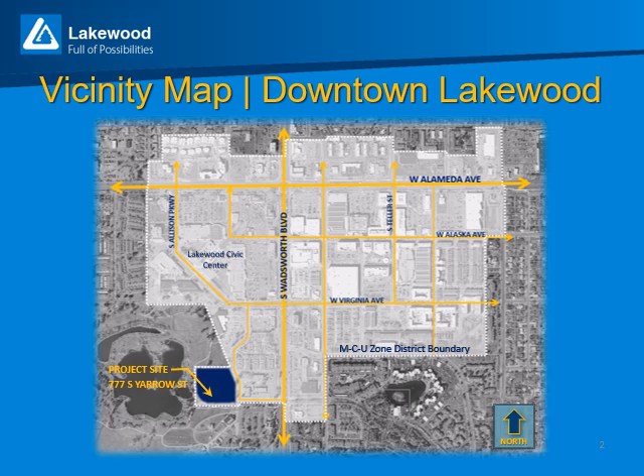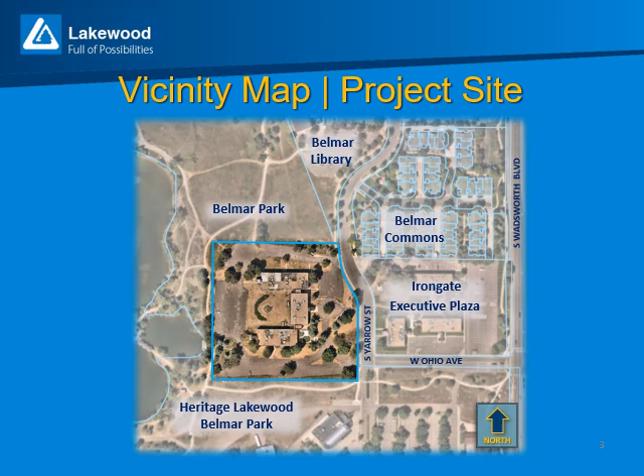Zooming in closer to the site, as depicted on this slide, we see that the site fronts onto South Yarrow Street and is surrounded on three sides by Belmar Park. The site was initially developed in the 1970s and early 80s as part of the phased Irongate Executive Plaza office complex, which included 777 South Yarrow Street and the property directly east of it.

The applicant is proposing to redevelop the 5-acre site with a 6-story, 411-unit multifamily building. The new development will include 561 parking spaces located in a parking structure internal to the building. As part of this redevelopment, the property owner has agreed to dedicate approximately 8,600 square feet of land that surrounds the historic pump house to the City of Lakewood.

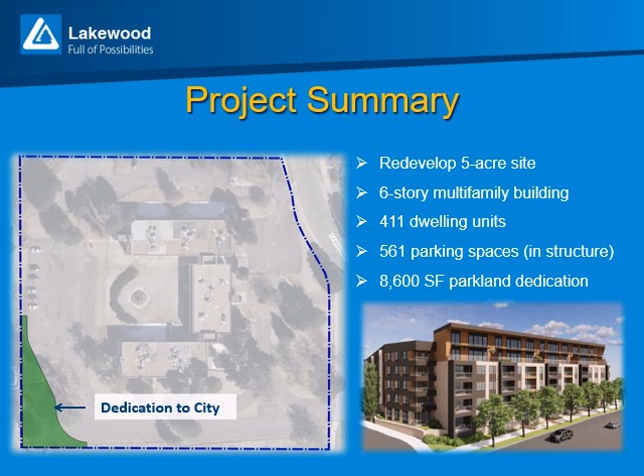The existing pump house, currently located on private property, is covered by a municipal purposes easement, which will be vacated after the deed conveying this land to the city has been recorded. The warranty deed for the parkland dedication has been fully executed, and the document will be recorded by city staff following the public hearing if Planning Commission determines that the major site plan satisfies the applicable zoning regulations.

In its current configuration, the gross site area is 5.25 acres in size. The proposed land dedication to the city will result in a net site area, or developable area, that is 5.05 acres, which is reflected as the site area and new boundary configuration depicted on the site plan and on this slide.

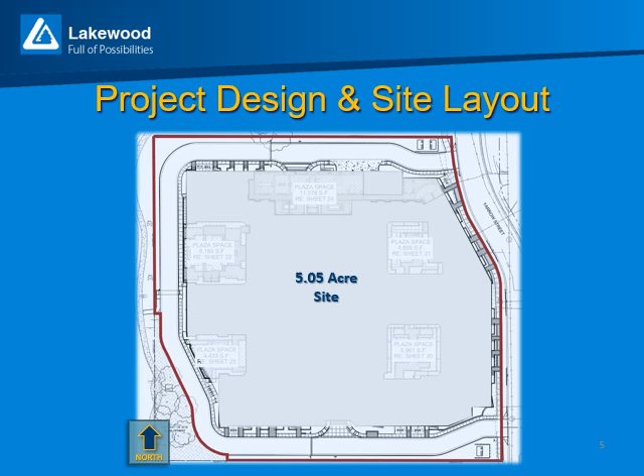Vehicle circulation and emergency vehicle access is accommodated via a private driveway that will take access from South Yarrow Street in 2 locations. Access to the parking garage is internal to the site at the north and south sides of the building. The project will include signage restricting access for non-emergency and non-service vehicles west of the garage access points.

A change in surface material is proposed for the portion of the driveway where access will be restricted to any vehicle that is not on site for emergency or utility service purposes.

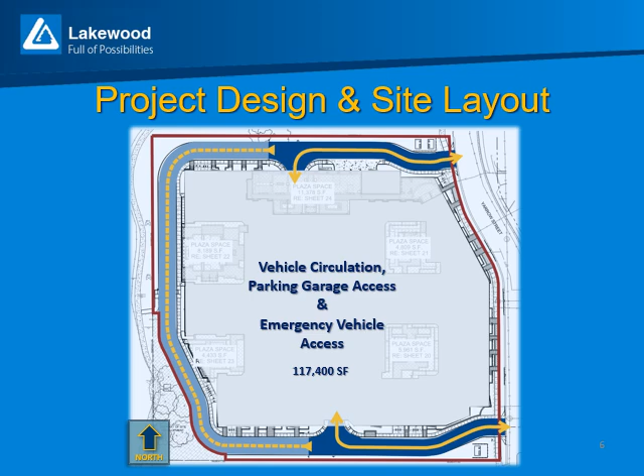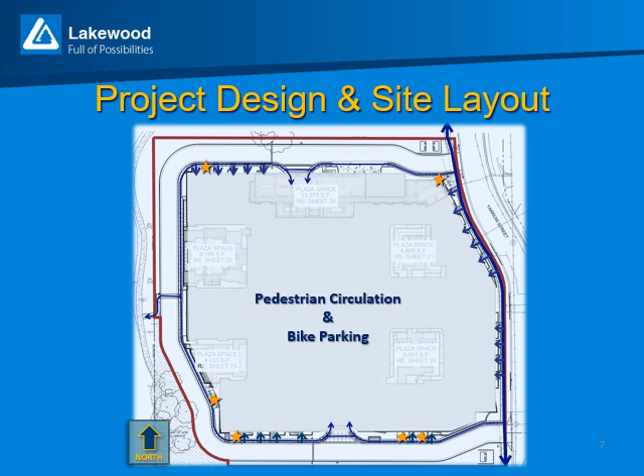Grade separated sidewalks are proposed from the public sidewalk on Yarrow Street to the ground floor entry stoops, the project plazas, and bicycle parking facilities, as well as the primary building entrance. Bicycle parking facilities are identified with a star symbol on this slide. Private internal sidewalks also connect to the public trail located west of the project site in Belmar Park.

The proposed building footprint is 128,778 square feet in area, which includes approximately 35,000 square feet of parking structure that is wrapped on all sides by residential dwelling units.

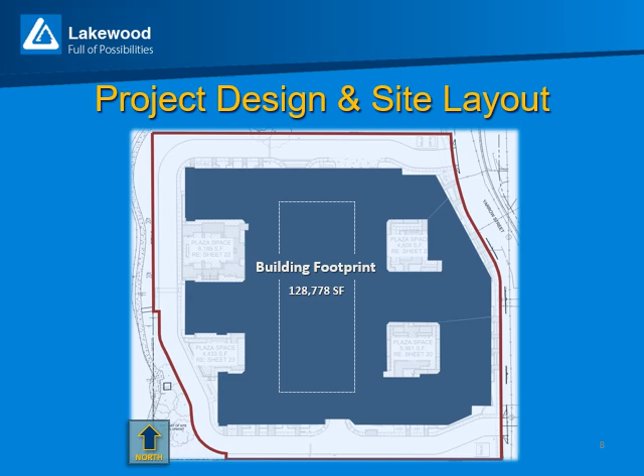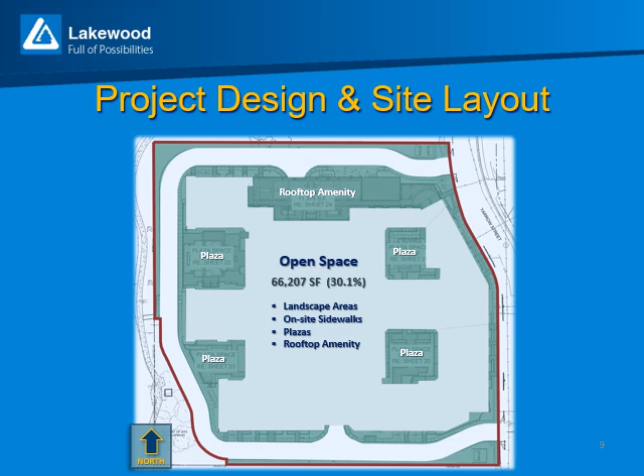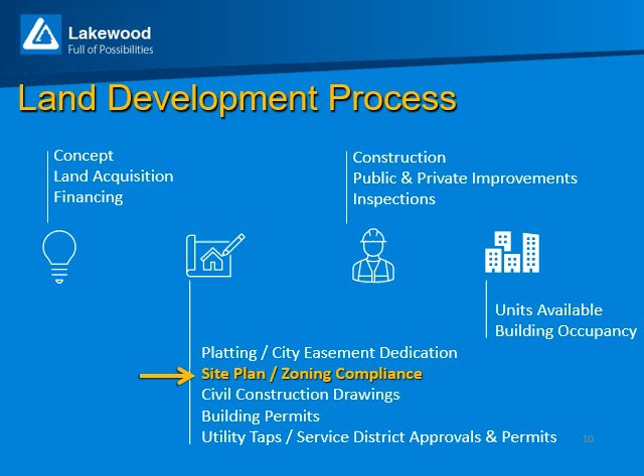Compliance with adopted zoning regulations is only part of the overall land development process required to secure building permits. In addition to the major site plan, there are other design plans, reports, and construction documents that do not fall under the planning director's authority to review or approve. For example, civil engineering construction documents and reports are required with the formal site plan application, but they are reviewed and approved concurrently by the city engineer.

The zoning ordinance designates the planning director as the authority responsible for reviewing and rendering a decision on the major site plan document. Separate from the city's review and permitting process, a developer must also navigate the plan review and approval process required by the sewer and water district, fire district, and dry utility agencies that provide gas, electricity, and communication to the project.

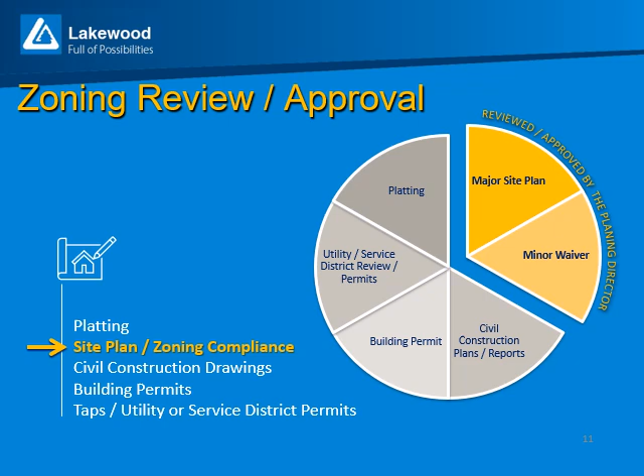The city issues a courtesy referral of the site plan application to applicable utility districts and service providers to inform them of the development proposal. This allows the utility districts and service providers to review the project and communicate specific agency regulations, permit requirements, and review processes back to the applicant.

Following the initial project referral, it is the applicant's responsibility to submit required detailed design plans directly to the district or agency to secure plan approvals and/or acquire any non-city permits. Each district and agency have their own application and permit process. Separate agency reviews and permits are not required prior to the major site plan approval.

Article 2 of the Lakewood Zoning Ordinance establishes the processes and procedures for planning review within the city of Lakewood. A major site plan is required for redevelopment that includes a new building or when a change is proposed to the site that affects 20% or more of the site area. The site plan is intended to demonstrate compliance with zoning regulations pursuant to the process outlined in the zoning ordinance.

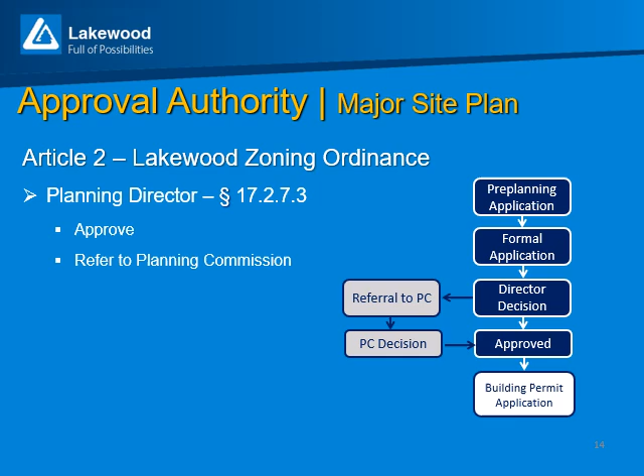The planning director has authority to review and render a decision on a major site plan application, or the planning director can refer the application to the planning commission to hear and render a decision.

A minor waiver is required whenever an applicant has proposed a superior design modification to a design standard within the Lakewood zoning ordinance. Recommendations and decisions regarding waiver applications shall be based on the review criteria in the zoning ordinance.

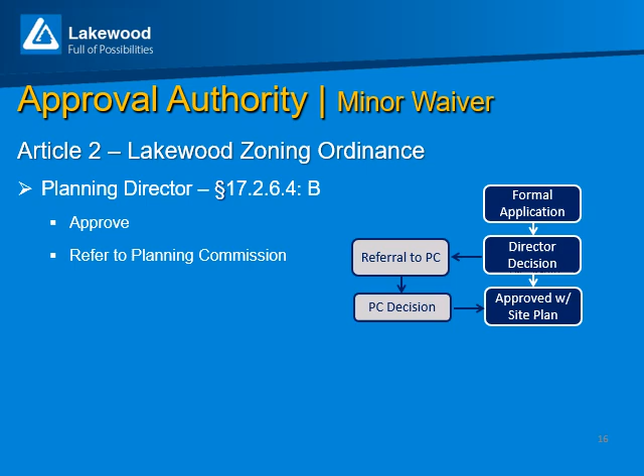Similar to the site plan process, the zoning ordinance gives the planning director authority to review and render a decision on minor waiver applications or refer the application to the planning commission to hear and render a decision.

Notice of the public hearing was posted on the subject site, posted at City Hall, and published in the newspaper of record, as well as on the city's website. The zoning ordinance does not include a mailed notification requirement for major site plans or minor waiver applications, including those that are referred to the Planning Commission by the planning director.

Recommendations and decisions regarding the major site plan shall be based on the following criteria. First, the major site plan shall comply with the standards outlined in Articles 3, 4, 5, 6, 7, 8, 10, and 13 of the zoning ordinance.

Second, the director shall evaluate how well the proposed modifications contribute to the overall performance of the site and how well the proposed changes meet the standards in those same articles of the zoning ordinance.

Articles 3 and 10 do not have standards applicable to this land development proposal. Article 3 is applicable to development applications that are seeking to be initially zoned or rezoned into a new zone district and does not have any specific designs or development standards that are applicable to site redevelopment.

Article 10 outlines standards and review processes applicable to wireless communication facilities. The proposed multifamily development does not include any existing-to-remain or new wireless communication facilities as part of the project.

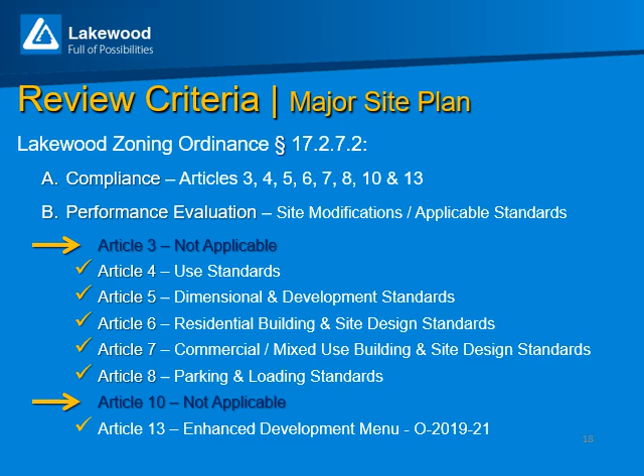Zoning standards for projects in mixed-use districts with an urban context are intended to achieve a pedestrian-friendly environment with a street network that is conducive to pedestrian and bicycle access.

The context requires buildings to be located within a short distance of the adjacent public street, with parking located within a structure and/or to the side of the building.

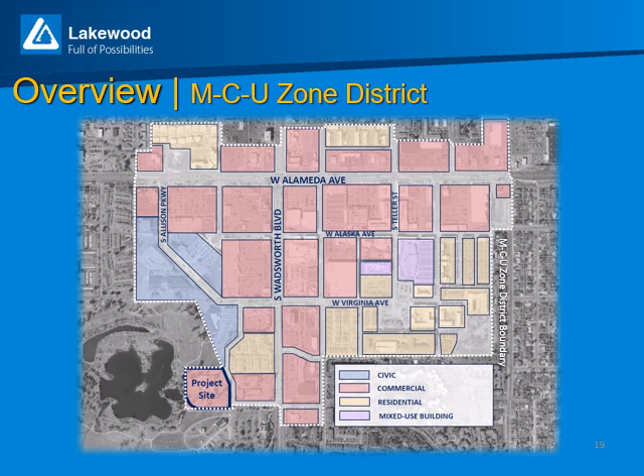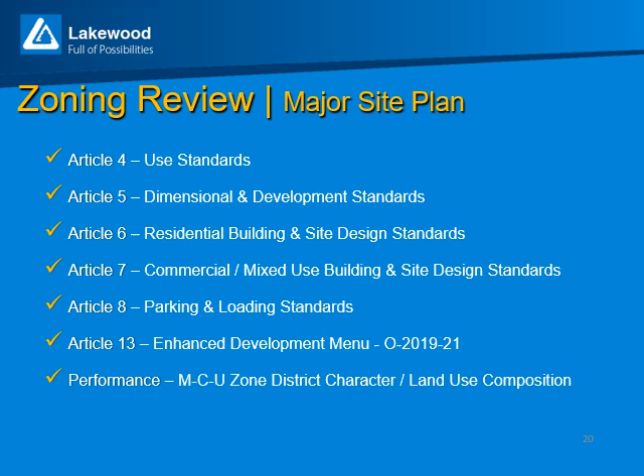This major site plan was reviewed to ensure compliance with the applicable zoning standards, and it was evaluated for the project's performance and overall contribution towards achieving the intended character and land use composition within the mixed-use core urban zone district.

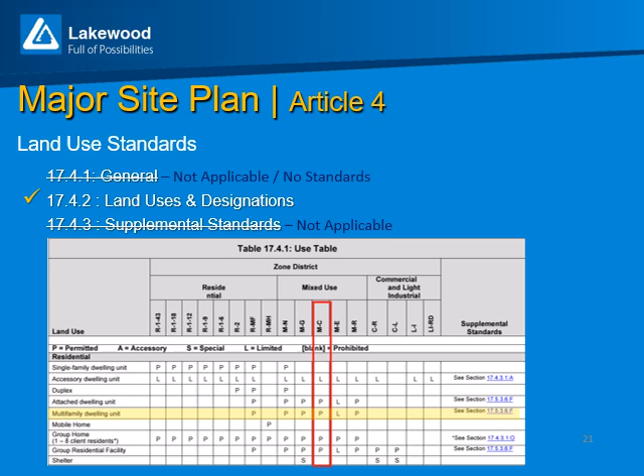Pursuant to the use table depicted on this slide, the proposed multifamily dwelling unit land use is a permitted use in the mixed-use core zone district. The section reference 17536F in the supplemental standards column of the table is only applicable to residential projects in the mixed-use employment districts and does not apply to this project. Article 5 standards regulate the placement and height of buildings, which apply to all new development and redevelopment.

Under the general standards, the project complies with the setback and height applicability, exception, and measurement standards. The development proposal includes a minor waiver request to the facade setback requirement, which will be addressed later in this presentation. Standards located within Section 1752, 1754, and 1755 are not applicable to the proposed project. The project does comply with the applicable dimensional and minimum story requirements, which I will detail on the next slide.

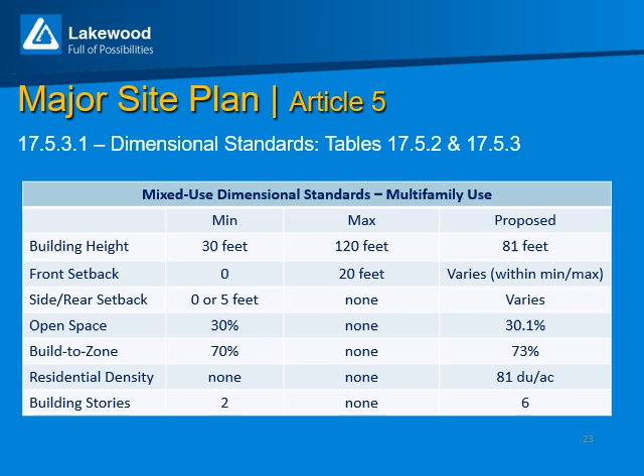This chart shows the dimensional standards that are applicable to new projects within the M-C zone district. The site plan was reviewed to verify that the project satisfies the building height, setback, minimum open space, minimum build-to zone, and minimum building story requirements.

Article 6 establishes site and building design standards for new residential development in Lakewood. The project is satisfying the building design, screening, pedestrian circulation, landscape design, fence, and lighting standards, as I will detail over the next 8 slides.

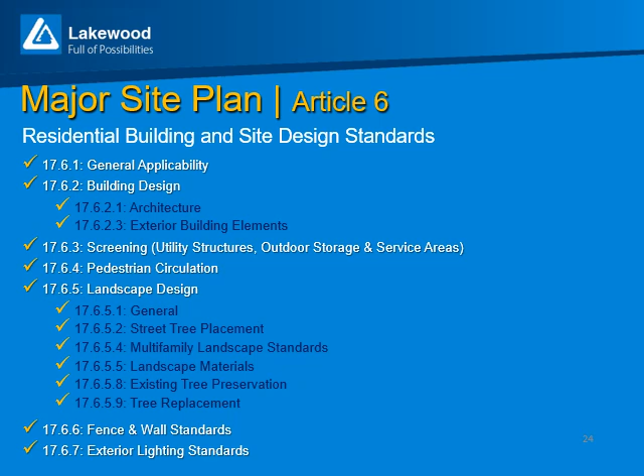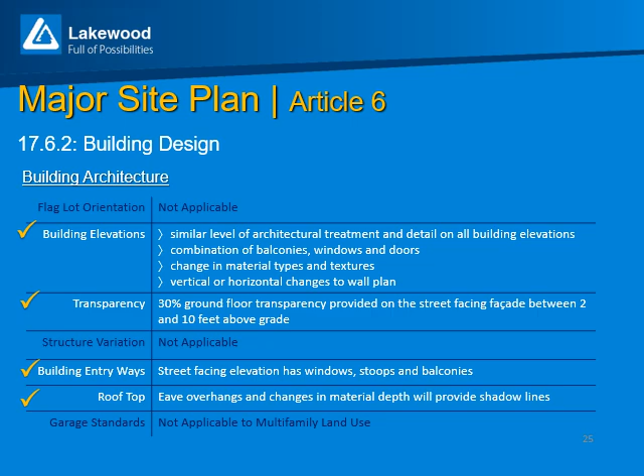Section 1762 includes standards that inform specific aspects of the building design and building architecture. The site plan was reviewed to verify that the project satisfies building elevations, transparency, building entry, and roofline contrast for the portion of the building that includes the slope roof.

To minimize the impact of mechanical and service elements associated with the building, the proposed utility meters will be screened from view of the public street. Rooftop equipment will be screened by parapet walls, and roof drains will be architecturally integrated into the building structure. The project does not propose any stairwells that are exterior or external to the building.

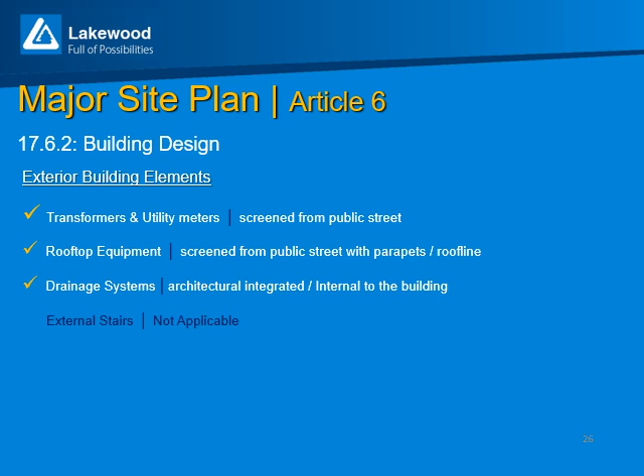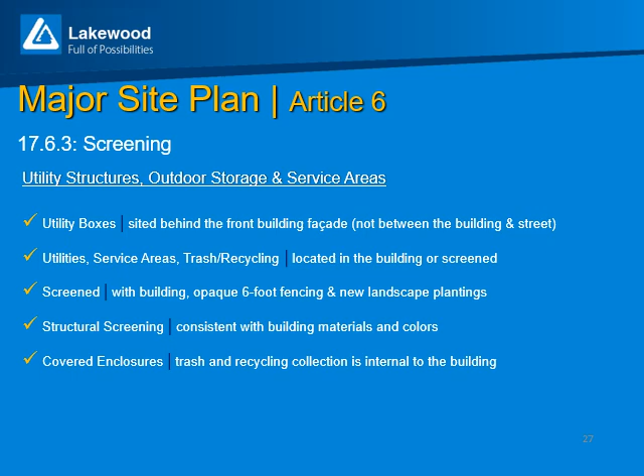Moving on to standards associated with utility structures and building service areas, the 2 transformers required for the project are located behind the front building facade and will be screened with structural and landscape elements on all sides except for where an opening is required for access. Trash and recycling collection bins will be located within the building and will be covered by a roof.

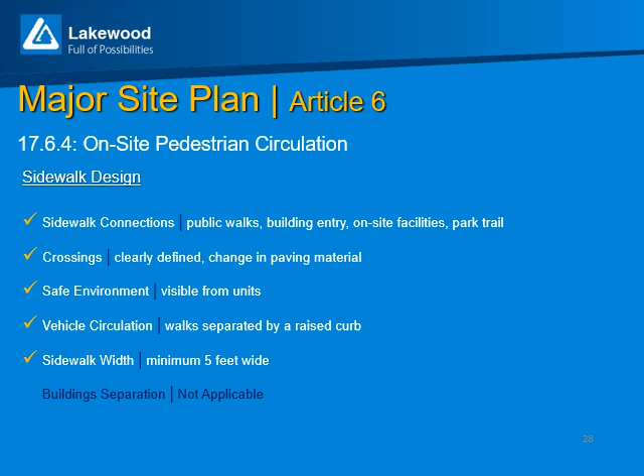Internal sidewalks will provide pedestrian access to primary building entrances, all on-site facilities, the adjacent public sidewalks, and the multi-use trail in the adjacent park. All sidewalks will be at least 5 feet in width, and they will be separated from vehicle driveways by a raised 6-inch curb.

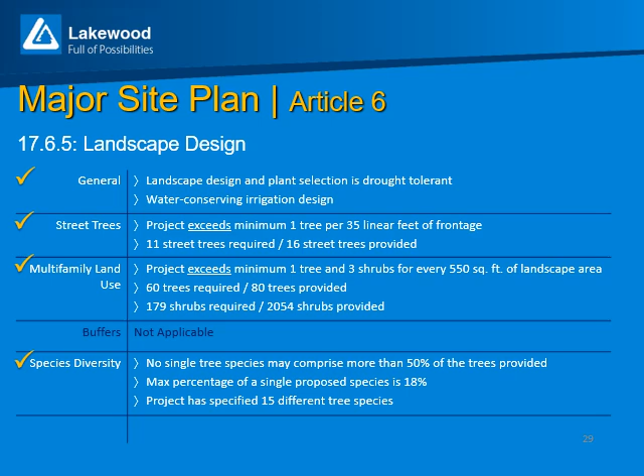The project landscape design includes a diverse plant selection that is appropriate for our arid climate. The proposed landscaping will exceed the minimum street tree and on-site tree and shrub quantity requirements as outlined in section 17.6.5. The trees and shrubs that are specified in the plant schedule are consistent with the minimum size requirements for new plant material, and the project will satisfy the tree replacement requirements through a combination of new trees being planted as well as a fee in lieu.

The project will be preserving and protecting 7 existing trees, removing 66 trees, planting 174 new trees, and will pay a $415,200 mitigation fee pursuant to section 17.659 of the zoning ordinance.

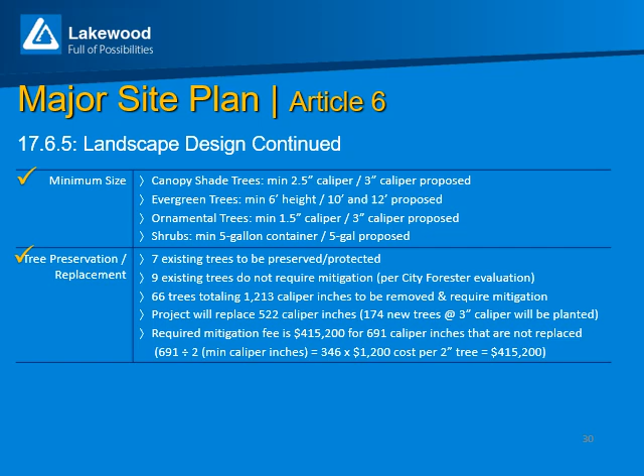The project will have open ornamental iron fencing for ground floor residential stoops and to enclose the proposed courtyards. Site fencing will range in height from 3.5 to 5 feet tall, which is well within the 6-foot height fence limit for multifamily uses. A 6-foot privacy fence/utility equipment screen is proposed to screen the new transformers, which will be located at the northeast and southeast corner of the site.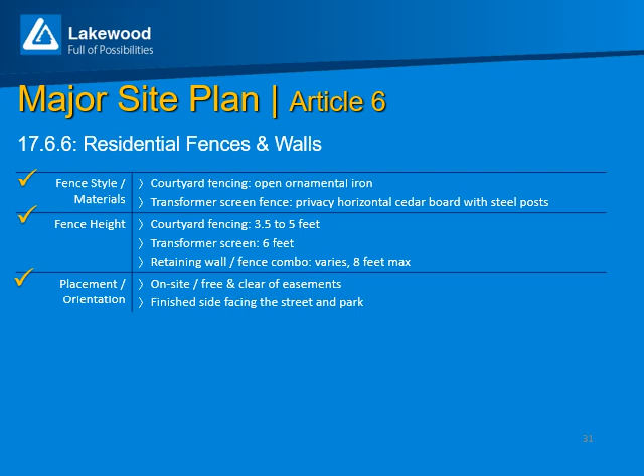The project is designed to achieve a 0-foot candle reading at all property lines. Light fixtures are full cutoff and directed down towards the ground. Energy efficient outdoor lighting is specified for the project.

Article 7 establishes building and site design standards for all buildings and sites with uses other than residential development in the city. In general, the building and site design standards in Article 7 do not apply to this project because it is a residential land use.

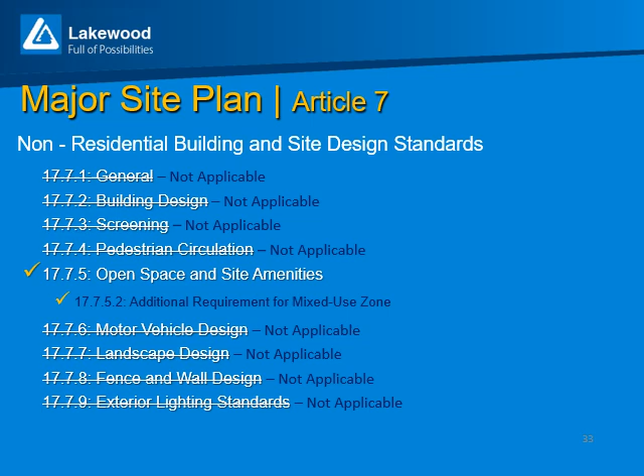However, a more restrictive applicability statement located in section 17.7.5 states that the open space and on-site amenities requirement is applicable to residential developments when the site is greater than 2 acres in size.

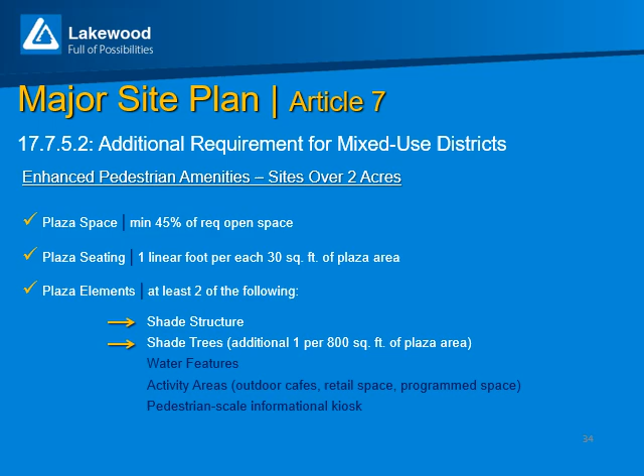The site has been designed to incorporate 5 separate and unique plaza areas that exceed the minimum area required in the mixed-use core urban zone district. In addition to seating, each plaza incorporates 2 additional pedestrian elements to satisfy the enhanced pedestrian amenity requirement pursuant to this section.

Article 8 establishes parking standards for each land use within the zoning ordinance. The project is satisfying the general, visitor, bicycle, electric vehicle charging, and loading standards as detailed over the next 4 slides.

The proposed parking garage will accommodate more than 1.25 residential parking spaces per unit, plus an additional visitor parking space at a rate of 1 space per 15 units, for a total of 561 spaces.

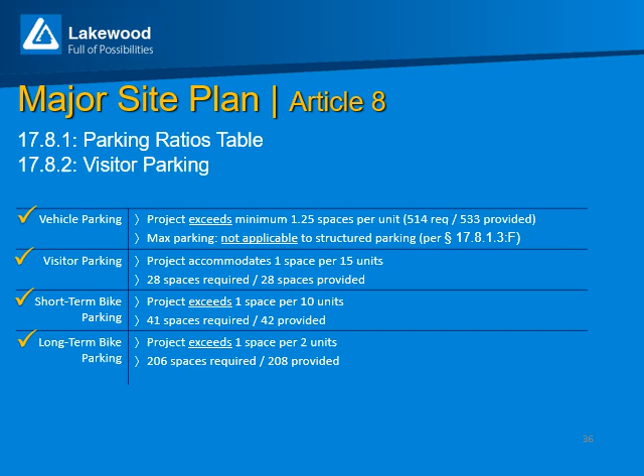Bicycle parking is accommodated via 42 short-term parking racks and 208 long-term bike parking spaces. Bike racks providing short-term bike parking facilities are located in proximity to the building entries and are accessible from the internal sidewalks that connect to the public walk and park trail.

Long-term parking and bike storage is accommodated in a dedicated locked bike storage room located within the building.

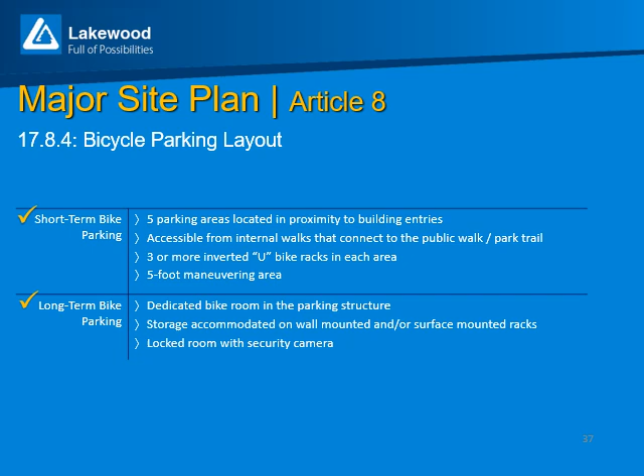New multifamily developments are required to provide electric vehicle charging stations along with electric vehicle charging station capable parking spaces. The project will include 12 parking spaces that will have EV chargers installed when the CO for the building is issued. An additional 109 spaces will be constructed as EV capable spaces, so additional charging stations can be accommodated as warranted by future demand.

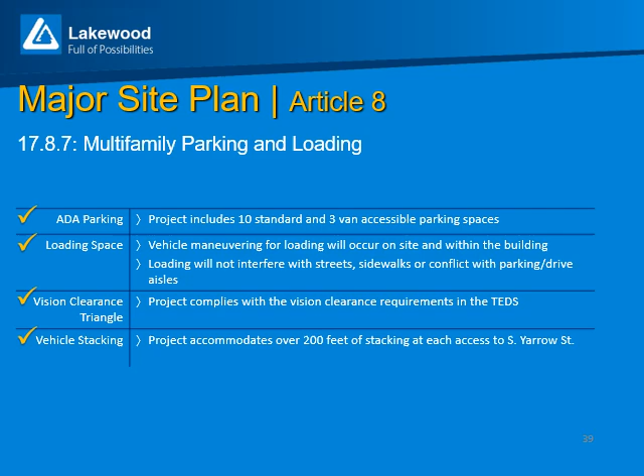Building services and project loading is located on site and internal to the building with access through overhead doors on the north side of the structure. The site will accommodate over 200 feet of stacking at each driveway access point onto South Yarrow Street, which is well over the minimum 60-foot stacking required based on the number of parking spaces.

The major site plan was reviewed for compliance with Article 13 Enhanced Development Menu Standards that were in place at the time of the formal site plan application. Based on the proposed building gross floor area, the project is achieving the required 50 points through the 9 menu items that are listed on this slide.

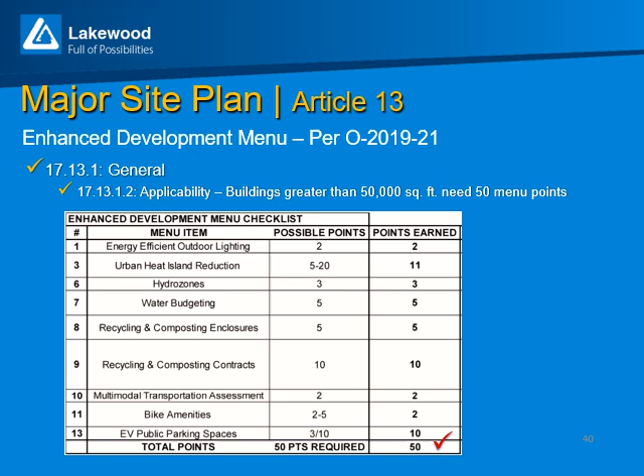To recap, the purpose of the major site plan review is to ensure the development proposal complies with the applicable zoning standards in Articles 3 through 8, 10, and 13, and to evaluate a project's performance and overall contribution towards the character and land use composition within the mixed-use urban core district.

It is now time to take a look at the design waiver request to address minor encroachments associated with the facade step-back standard per section 17.515C, located in Article 5.

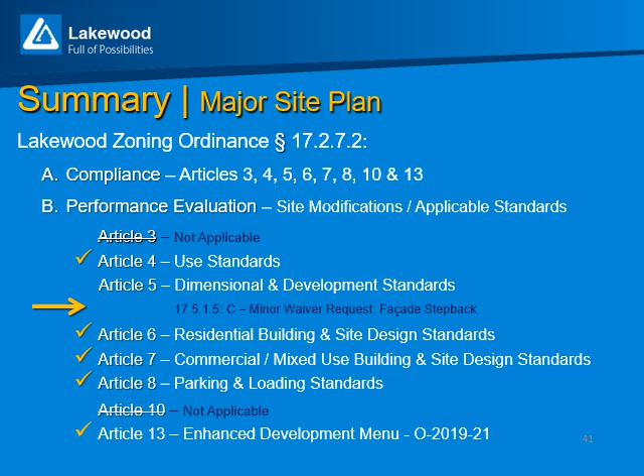The facade step back requires buildings that are taller than 45 feet in height to provide a 10-foot facade step back at that 45-foot building height, along with another 10-foot step back for every additional 30 feet in building height.

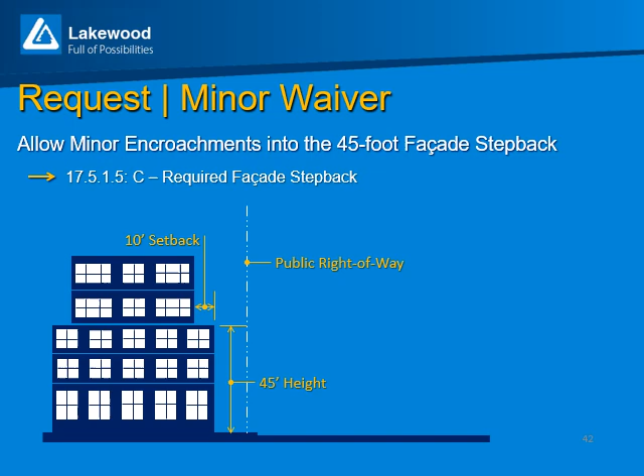The applicant is requesting relief from the facade step back to allow minor building encroachments above the 45-foot building height and within the 10-foot facade step back area.

If the request is approved, it would allow architectural elements including the roof overhang, cantilevered rooftop open space, balcony canopies, and unit privacy partitions, all depicted in green, to extend into the 10-foot facade step back. The waiver will also allow minor encroachment associated with several of the 4-story units, which is occurring due to the 6-foot elevation grade change along the public right-of-way adjacent to the front building facade.

When measured from the high point right-of-way elevation, located near the midpoint of the Yarrow Street building facade, the 4-story units are below the 45-foot step-back dimension. As the street drops in elevation towards the project driveways on either end of the site, the upper portion of some of the 4-story units gradually start to extend past that 45-foot height measurement.

This change in the right-of-way elevation along the project frontage causes a taper to the 45-foot height, which eventually reaches a point where the 4-story units no longer encroach into the facade step back. This dimensional taper is due to the method of measurement, which states that the 45-foot step back height is measured from grade at the right-of-way, which in this case, as with many other sites in Lakewood, can fluctuate across the property frontage.

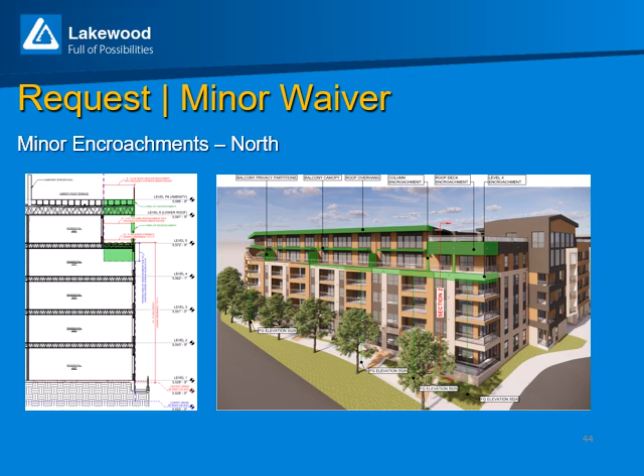The proposed architectural elements are intended to create comfortable outdoor spaces and help to activate the visually accessible facade step-back space, leading to community vibrancy, pedestrian interaction, engagement, and safety for the surrounding neighborhood.

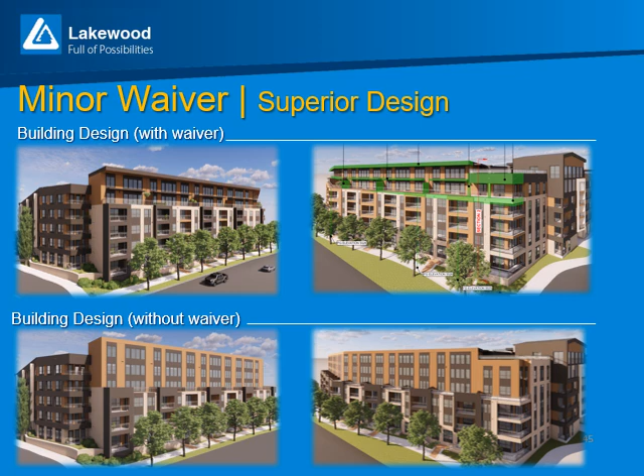Imposing a strict application of the standard will not change the number of proposed dwelling units. It also will not change the building mass and form, which is already permitted under the existing zoning.

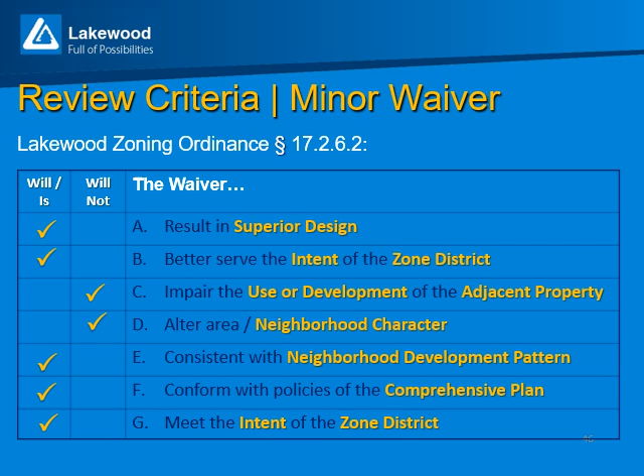It will not alter the area or the neighborhood character. It is consistent with the neighborhood development pattern that is desired in the MCU district. It will conform with the policies of the comprehensive plan. And finally, it does meet the intent of the zone district.

Based on the information provided in the staff report and details highlighted in this presentation, staff recommends that the Planning Commission adopt the findings of fact in order A through R as presented in the staff report and approve site plan case number SP 22-10 and minor waiver case WI 24-3, authorizing staff to issue a final major site plan approval as detailed on the following slide.

Building permits will be released for the project construction only after the project has secured approval for the major site plan, civil construction documents, and building permit plans, and the developer has paid all fees that are due prior to the issue of the building permit.